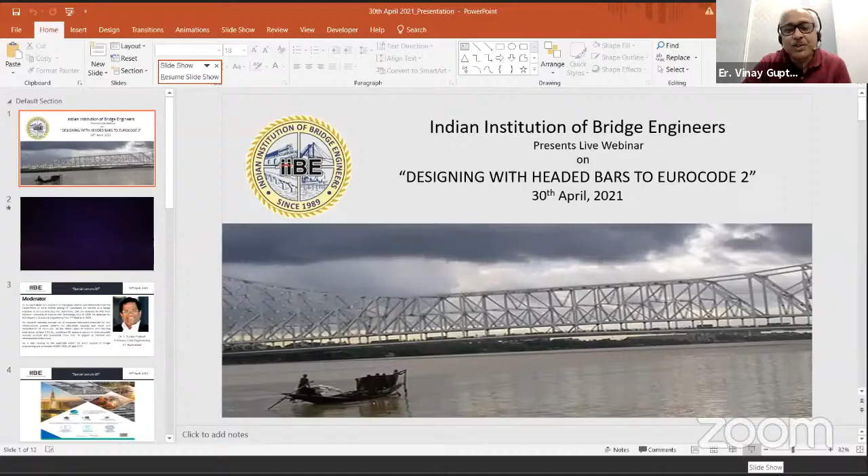This time I'm glad to have Mr. Richard Goodman, who agreed to deliver a lecture in one request. We had to only see that the times match. Being in a Western country, we had to fix a time 1 hour earlier than our normal time of 6pm IST, which suited him as well, being about 12:30 his time.

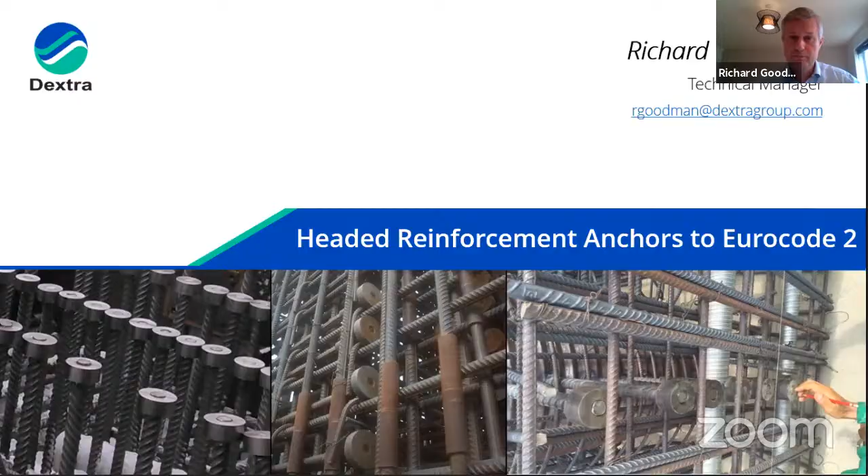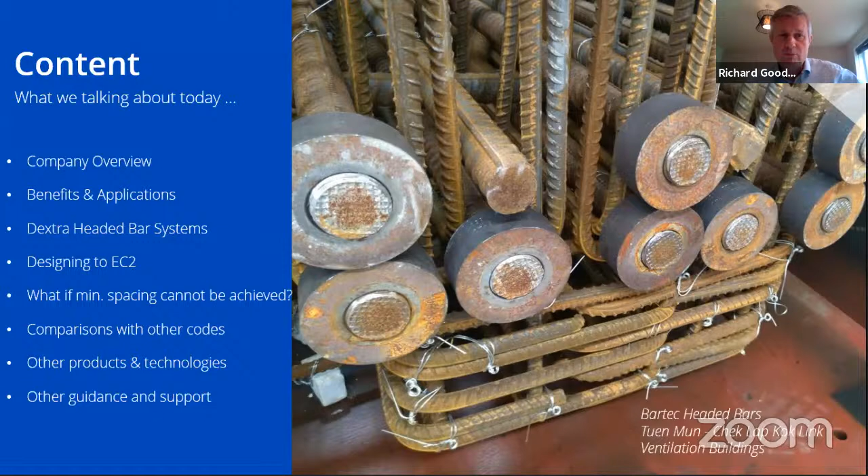I'm just going to give a very quick company overview, tell you who we are and what we do. You've seen the video already. Before looking at the benefits of using headed bars and what their various applications are, a quick look also at the various headed bar systems that Dextra manufacture, before looking at how you can design with headed bars in accordance with Eurocode 2, which would set out the parameters of design, including the spacing requirements, the edge distance, etc. But what if you can't meet those spacing requirements? What can you do? Some comparisons with other codes of practice around the world, a look at other products and technologies, and what other guidance and support is in the marketplace, and what guidance and support can Dextra offer.

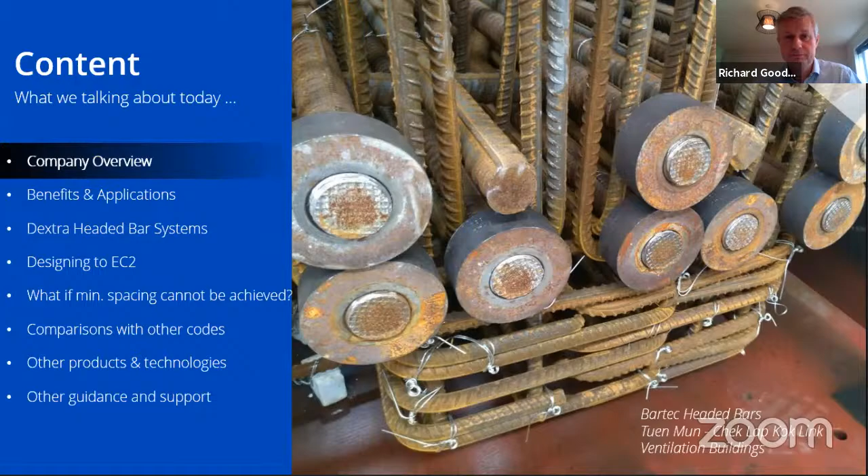You've heard a little bit about Dextra, so I won't dwell on this too long. We were founded in 1983 by a group of French entrepreneurs. Our head office and main manufacturing facilities are in Bangkok, Thailand. We've got over 900 employees in 13 offices around the world and active in 55 countries.

As well as having a factory in Thailand, we also have one in India, just outside Mumbai, and we have a factory in China where we design and manufacture our ground engineering products. Generally around the world, we work through distributors, and with headed bars, the processing of the end of the bar is performed with machinery which is designed and manufactured by Dextra. In India, this machinery will be either at our factory or on site, or possibly with cut and bend rebar suppliers.

As well as rebar couplers and headed bar systems, we also have a range of engineered bar systems - steel bar systems for post-tensioning or pre-stressing of concrete, steel bar systems for tying marine walls, and architectural or structural steel bar systems. And we have a range of ground engineering solutions, some of which make use of our steel bars. Others make use of fiber reinforced polymer bars, which we manufacture at a factory in China.

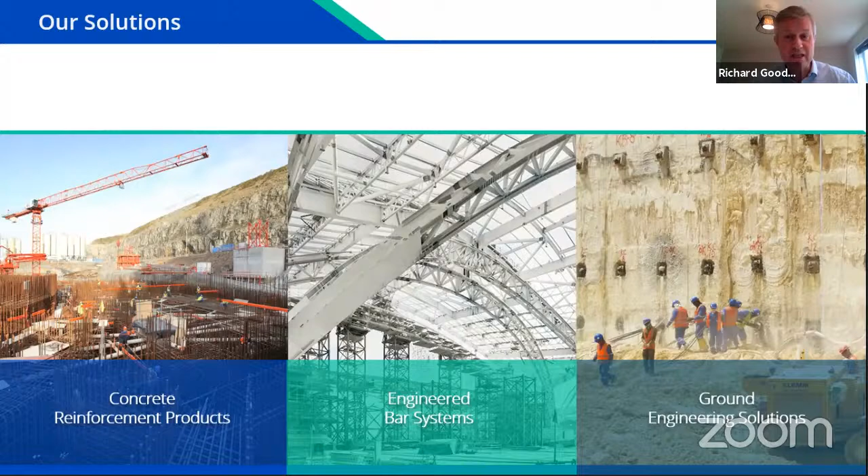As a company, we have a commitment to quality. We have quality assurance through Bureau Veritas, through UK CARES, the Certification Authority for Reinforcing Steels, and also through the American Society of Mechanical Engineers. We also have an in-house third-party accredited test laboratory where we're able to test steels that come in for further processing, and we're able to continuously test our products. Our products are certified by various bodies around the world, and these bodies tend to audit us twice a year and independently test our products continuously.

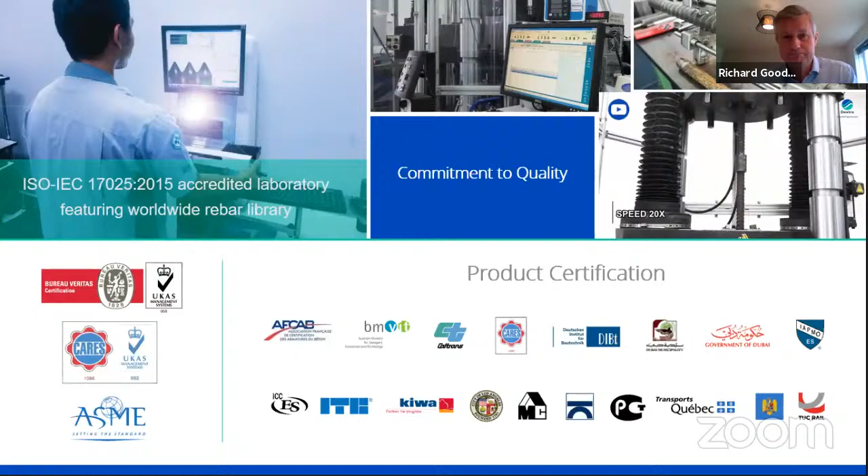So what then are the benefits of using headed bars and the various applications? Well, as I said, headed bars are used as an alternative to either a straight length or a bent length of bonded rebar which is bonded to the concrete to form an anchorage.

So there is potential for a saving on the amount of reinforcement used, and of course you don't have to bend the reinforcement. But in fact, the two main advantages of using headed bars are firstly that it reduces reinforcement congestion considerably, and secondly, handling and fixing a straight bar with a head on the end is a lot easier and quicker on site than fixing a bar bent on both ends. This can lead to a time saving on site, and a time saving can lead to a cost reduction for the contractor.

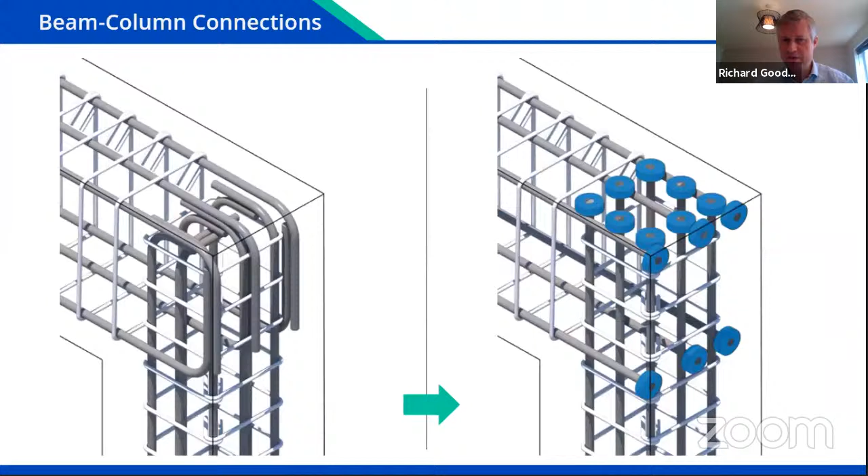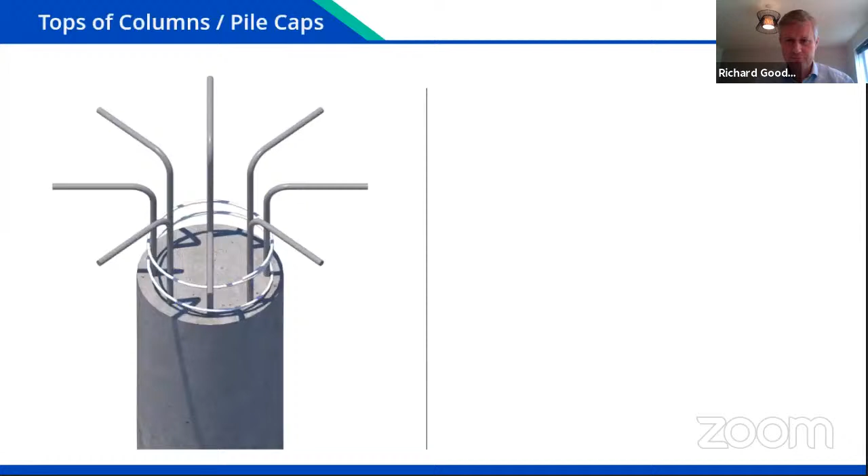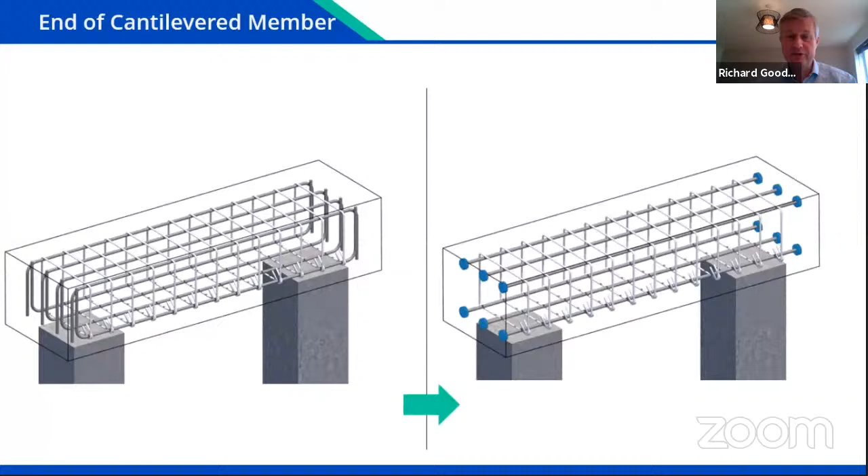The top of columns, or top column crossheads, again as an alternative to a bent bar anchorage. They can be used at the top of pile caps, or at the end of cantilever members, or in corbels.

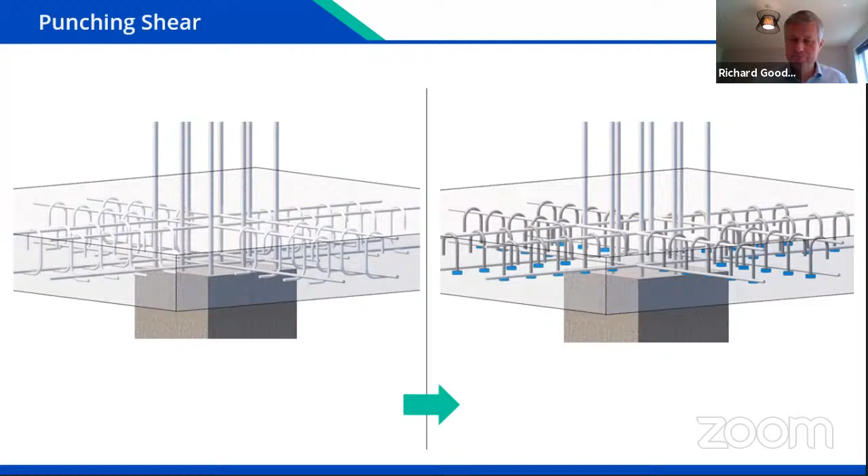And finally, they can be used as cross-wall shear ties, with a head on either one or both ends of the tie.

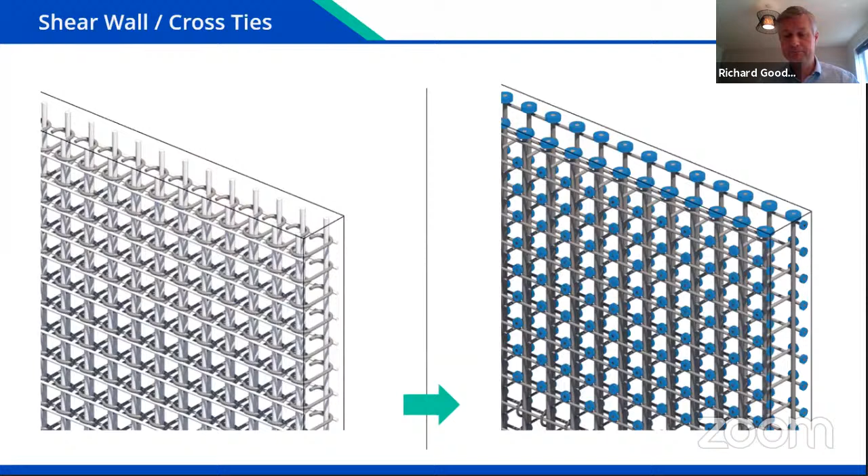Dextra manufacture a range of headed bar systems, not all of which we sell in all markets around the world, but the heads we sell are suitable for 10 right up to 50 millimeter rebar diameter, and we sell them in two main sizes. The smaller size has a bearing area - that is the bearing area underneath the head that bears onto the concrete - of just over 4 times the cross-sectional area of the bar.

We have this size because it is a prescriptive requirement for the USA Code of Practice ACI 318 for designing with headed bars. We also have a larger head with a bearing area equal to or greater than 9 times the cross-sectional area of the bar.

We're finding that the larger head is more commonly used in Europe, or where Eurocode is the applicable code of practice. The 3 systems you see in front of you actually use the same technology as our rebar coupler systems, but I'm just going to focus on the middle system, our Bartec system, because this is the system we tend to sell in India for our rebar couplers.

In the Bartec system, the end of the bar is first cut straight, and it is cold forged to increase the diameter of the bar locally, just at the end, before threading. We then simply screw on the heads, either a large or a small head. By doing this, we don't reduce the cross-sectional area of the bar at all, and we produce a full strength headed bar system, what we call a bar brake system.

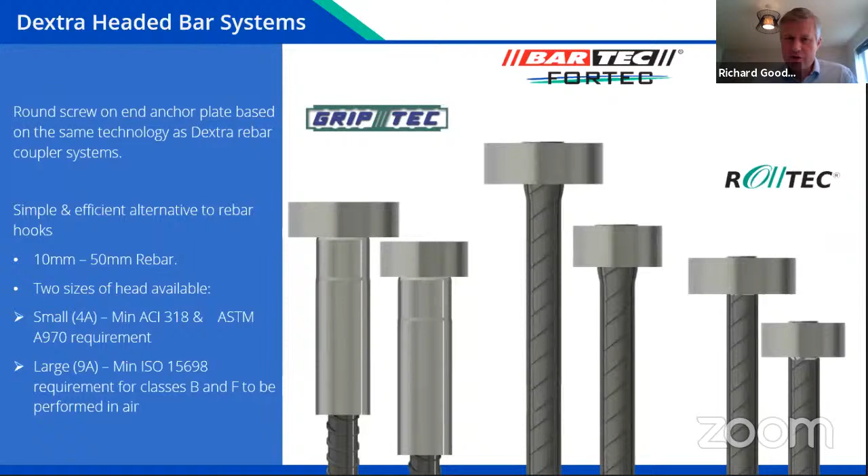The other systems, GripTec and Roltec, we sell in other regions, so I'm not going to dwell too much on those systems. We've also tried to innovate in this region over the last few years.

This is a system we've now introduced into some markets around the world. It's a system we're calling a pressed connection system. It has been specifically designed for smaller rebar diameters, 10 to 20 millimeters.

It's designed so you can cut and bend the rebar on an automatic cut and bending machine, place that bent rebar onto our machine, which is fully automated. The machine will heat the end of the bar by an induction heating process. This end head then gets placed over the end of the bar, all completely automated, and then the bar end gets forged to make the connection.

At the moment, it's only available with the large size, but potentially the same technology could be used for our small size of head. This is ideal for use with transverse shear reinforcement.

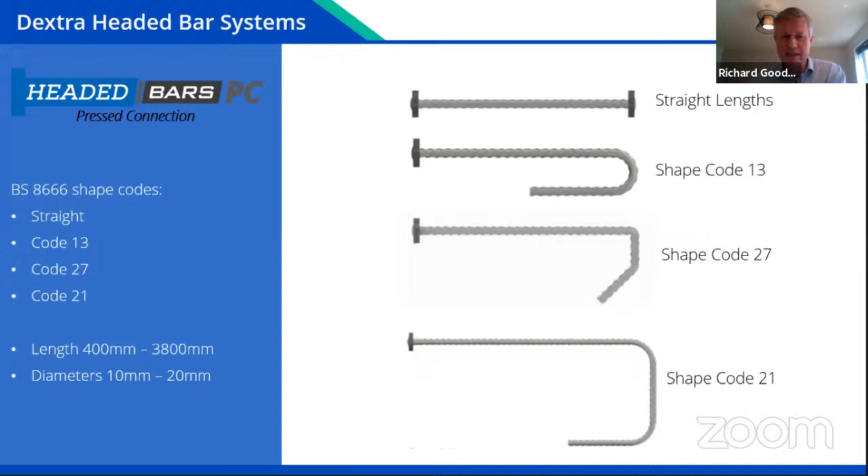Because with transverse shear reinforcement, rather than using what they usually call manual benders, it gets automatically bent in a cut and bend machine. It can be bent automatically, put on our machine, everything is completely automated, it goes around onto a cooling bed and then gets taken off the machine. So ideal for applications like this.

This is transverse shear reinforcement used on this very thick raft in the UK. You can see at the top, we have a bent anchorage, so you can see all the anchorages at the top of this raft. And at the very bottom, some 3 meters or so away from the bend, you can see the head at the very bottom.

So all that happens on this project is they go along and drop this reinforcement into position and they are tying the top. Perhaps you can imagine the difficulty they would have if they had a bent anchorage at both ends. It would be considerably difficult and a logistical nightmare to try and construct the reinforcement.

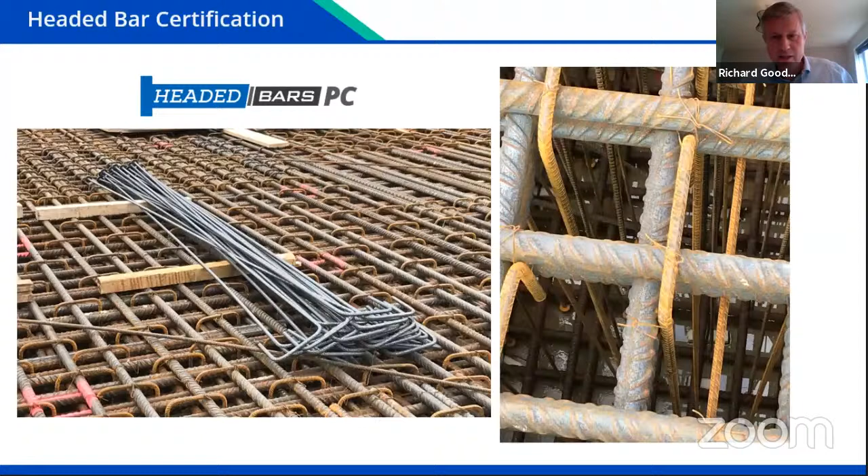So, of course, we hold test reports and certification for our headed bar systems. We have certification through ICC-ES in the United States and certification for various systems through UK CARES, that's the UK certification body for reinforcing steel. We also have independent laboratory test reports to show compliance with the ISO standard for some of our headed bar products, ISO 15698.

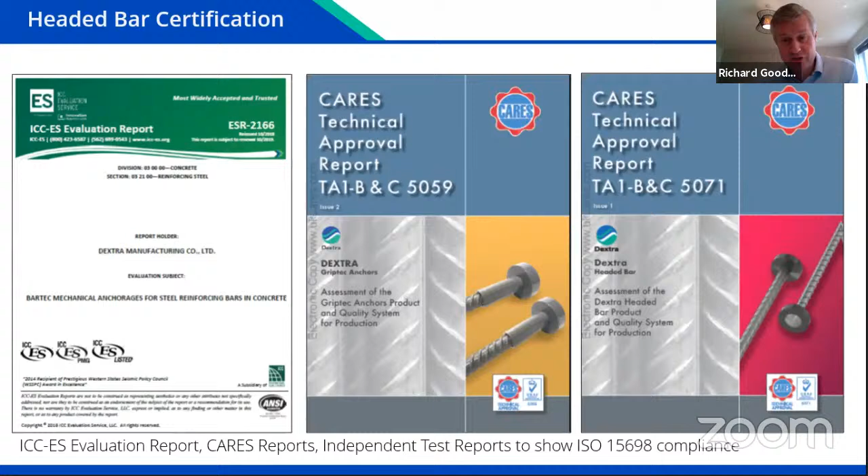So how would you design headed bars to Eurocode 2? Well, firstly, there are a number of product standards for headed bars, one of which I've already mentioned, ISO 15698, and there's a CARES testing requirement. There's also an ASTM standard, which they use in the United States.

But these standards tend to give measures for testing and for the requirements for the strength and robustness of a headed bar system. What they don't do, of course, is tell you how to design with a headed bar system. So for that, we look to the relevant code of practice, whatever that might be.

In some parts of the world, like North America, Australia and Japan, the use of headed bars is prevalent - they use a lot of headed bars. That's because their codes of practice give information about how to design with headed bars.

But the applicable code of practice in Europe, Eurocode 2, and for those countries that use Eurocode 2, there's no specific information that tells you how to design with headed bars, which has led to a situation where there's not been a huge market to date for use of headed bars. Their use hasn't been great.

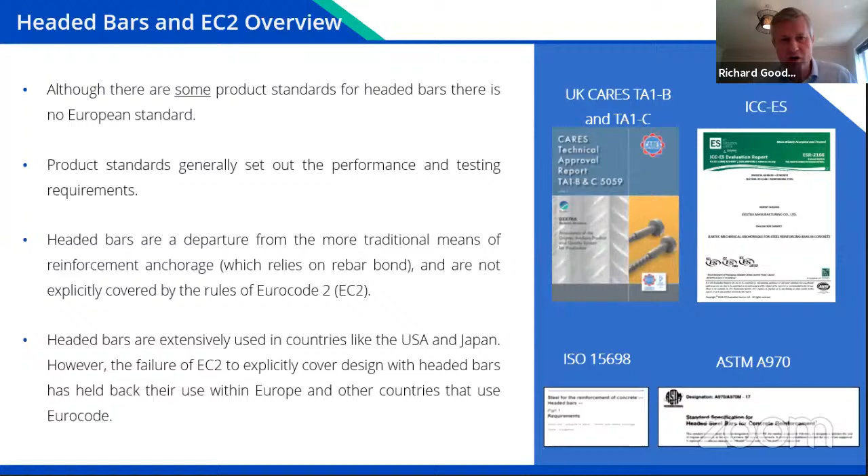So with this in mind, we contacted Arup, the consultant engineers, and we commissioned Arup to write a design guide for how you can design with headed bars in accordance with Eurocode 2.

So rather than being a product guide, this is really a design guide. It's intended as a non-contradictory supplement to Eurocode 2, and it focuses on the capacity of the concrete to resist the forces exerted by the head or by the rebar. So now we're hoping that this will give consultant engineers the confidence to design in accordance with Eurocode 2 and use headed bars.

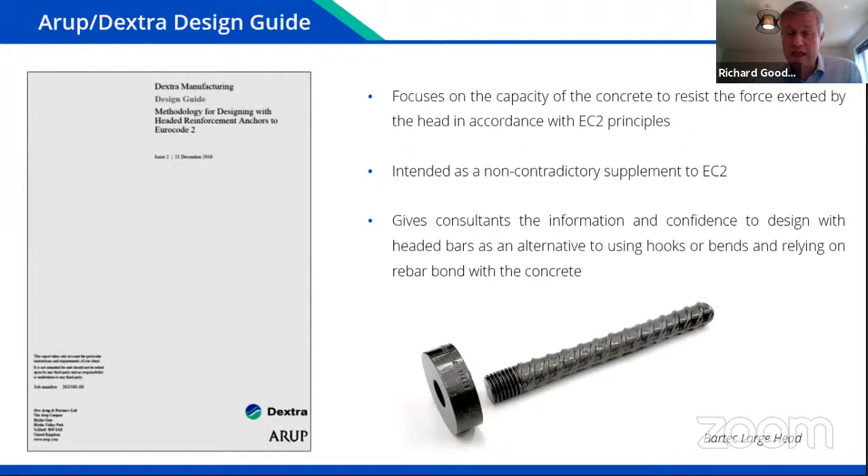While Eurocode 2 doesn't give any explicit information about how to design with headed bars, it does give information about large diameter bars. It says that for large diameter bars, classified as 40 and 50 millimeters, splitting forces are higher and dowel action is greater with the use of large diameter bars. Such bars should be anchored with mechanical devices. As an alternative, they may be anchored as straight bars, but links should be provided as confining reinforcement.

So for 40 and 50 millimeter diameter bars, it gives you the option of having a straight length of bar as an anchorage, or a mechanical device, or a headed bar system, but it doesn't actually give you the option of a bent bar.

Also, I'd like to highlight the Indian standard IS 456, which is for plain and reinforced concrete, and the design guide SP34, which is the handbook for concrete reinforcement and detailing. It states, with regards to the requirements for anchorage, that any mechanical or other device capable of developing the strength of the bar without damage to concrete may be used as anchorage with the approval of the engineer in charge.

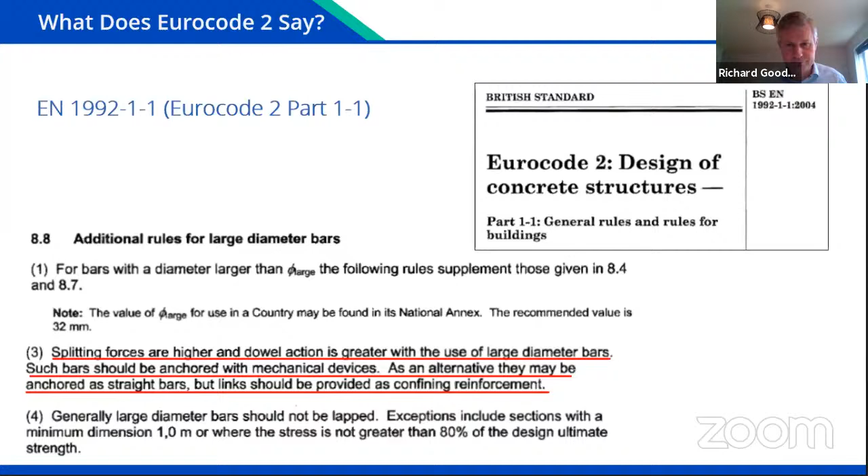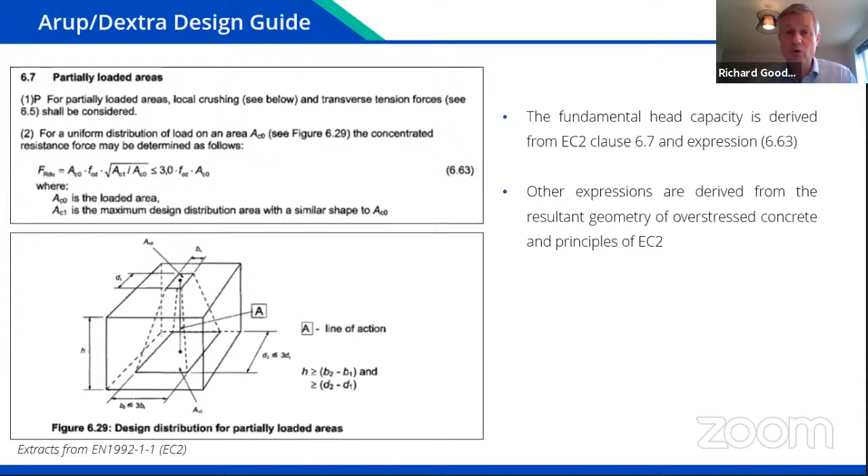The guide is derived from the fundamental principles of Eurocode 2. For the head strength or head capacity, we're looking at the ability of the concrete underneath the head to resist the loads. The basic requirements are taken from section 6.7, which deals with partially loaded areas - that is, small areas which are heavily loaded, causing local crushing underneath the localized area and transverse tension forces, much in the same way as a post-tensioning anchorage performs. Most of the other expressions are then derived from this or from the other requirements of Eurocode 2.

If you have a headed bar embedded in concrete, because the head is relatively small but the load is relatively high, we get a zone or volume of concrete directly underneath the head which becomes overloaded in compression. The stress within the concrete in this zone, shaded in blue, exceeds the design compressive strength of the concrete, but just locally. The stress is at its greatest directly underneath the head, but at distance it dissipates. At dimension h, the stress in the concrete equals the design compressive resistance of the concrete - exactly the same really as what's happening with a post-tensioned anchorage.

Because of this dissipation of force underneath the head, you also get a transverse bursting force. While the concrete is in compression directly underneath the head, transversely it is actually in tension - there's a small tension force which causes the bursting. These bursting forces need to be resisted by having enough concrete around the head or having transverse confinement reinforcement. If the head is large enough and the concrete is strong enough, the full design load of the reinforcement can be taken via the head, transferred to the concrete through this mechanism by head bearing alone.

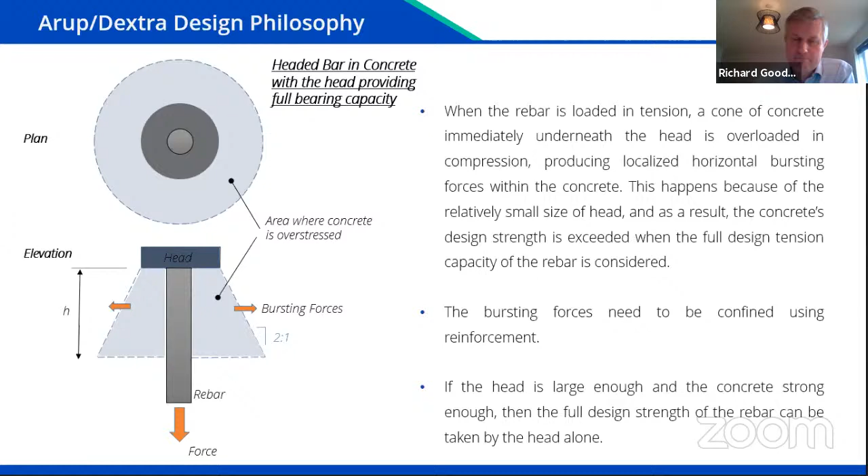However, if you have a relatively small head, or relatively weak concrete, you need to take your design force from your reinforcement via a combination of head bearing and rebar bond. Where you're considering rebar bond, the bond length you calculate needs to be outside of this overstressed zone, essentially because we have these transverse bursting forces within this zone, and therefore a reduction in the bond just locally underneath the head.

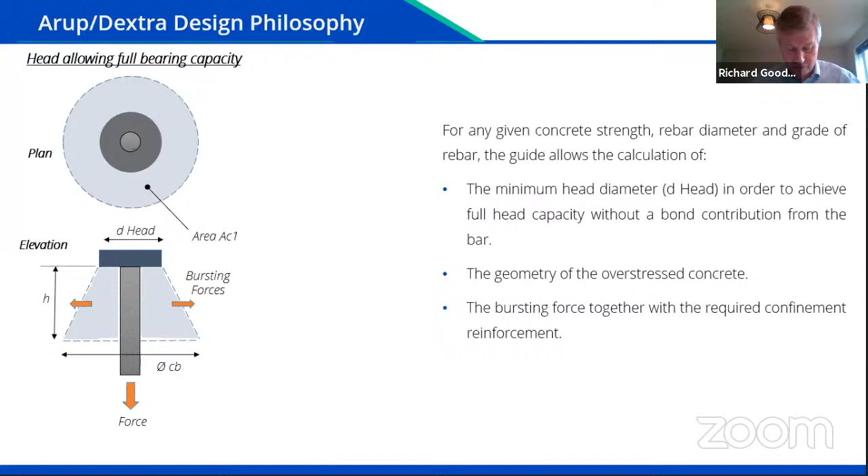So the Arup guide is based on the fundamental principles of Eurocode 2. For any given concrete strength, rebar diameter and rebar strength, the guide allows you to first calculate what size of head is required in order to take the full load via head bearing alone. It also allows you to calculate the geometry of this overstressed region, the height h and diameter cb. If the head isn't large enough, it allows you to calculate the bursting forces, the transverse bursting forces, and once you know these, it allows you to calculate the transverse confinement reinforcement required to resist them. And if the head isn't large enough or the concrete is fairly weak, it allows you to calculate what load can be taken via head bearing and what load needs to be taken via rebar bond.

Knowing the geometry of this region which is overstressed allows us to calculate the spacing requirements for the heads, because these zones of overstressed concrete need to be kept separate. So in the case you see before you, the minimum center to center distance would be diameter CB, because that is the diameter at the base of these overstressed cones of concrete. And the minimum edge distance to the edge of your concrete would be half of CB.

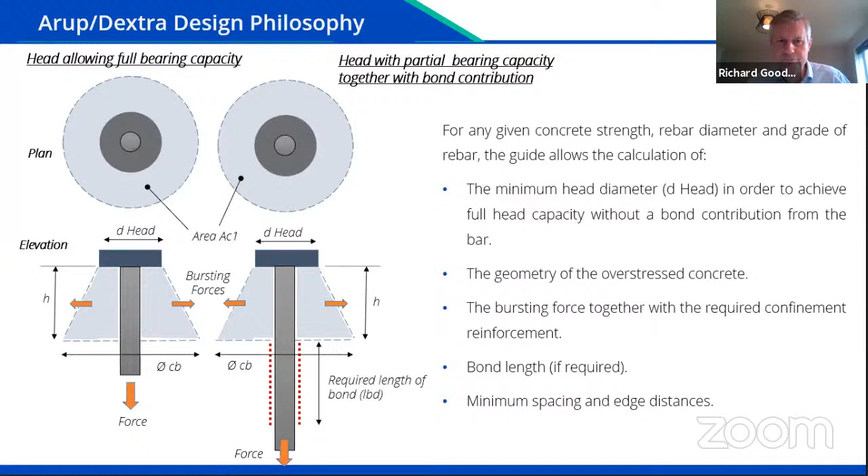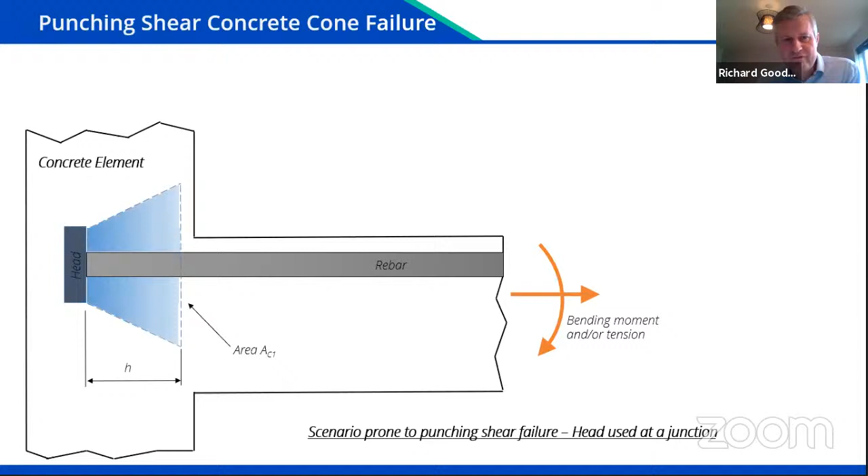If your head is too close to the edge of concrete, there can be a punching shear cone failure where the bar and the head try to punch completely out of the concrete. One situation prone to this kind of failure is in a beam column connection, because you can get a zone of concrete where there's not enough concrete to resist the forces from the head, leading to propagation of a punching shear cone failure. However, this failure mechanism can be calculated in accordance with Eurocode 2, and if necessary, additional reinforcement can be added to prevent it occurring.

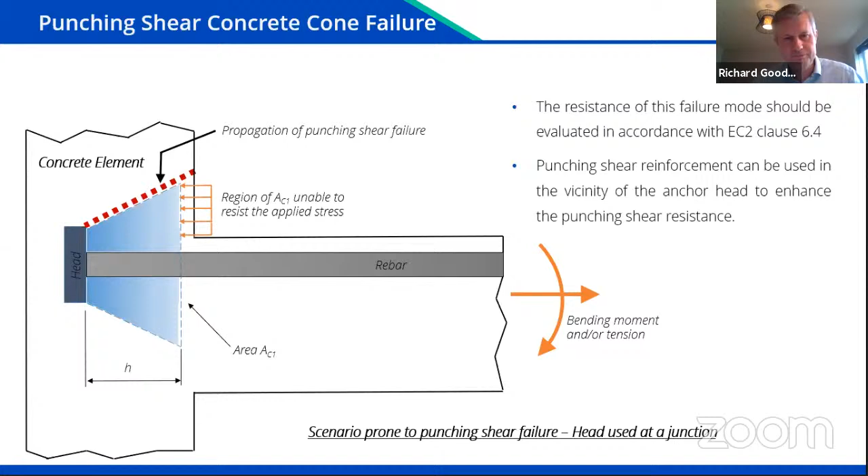Eurocode 2 does allow you to use headed bars. It calls them mechanical anchorages, taken to mean headed bars. It gives information about large diameter bars, saying they need to be anchored with headed bars or with straight lengths of anchored bar. But it doesn't explicitly give you any design information, and it doesn't explicitly tell you that you can take part of the load via head bearing and part via rebar bond. So where does the justification for doing that come from?

There are many technical reports and papers written about this based on experimental research, and all of them show that if there is a bonded length in the anchorage zone, load is first taken by this bonded anchorage zone length. But very quickly, at quite small loads, the load is then transferred also to the head. Thereafter, it is taken via head bearing and rebar bond if there is an available bonded length. If there isn't an available bonded length in the anchorage zone, the load has to be taken via the head alone.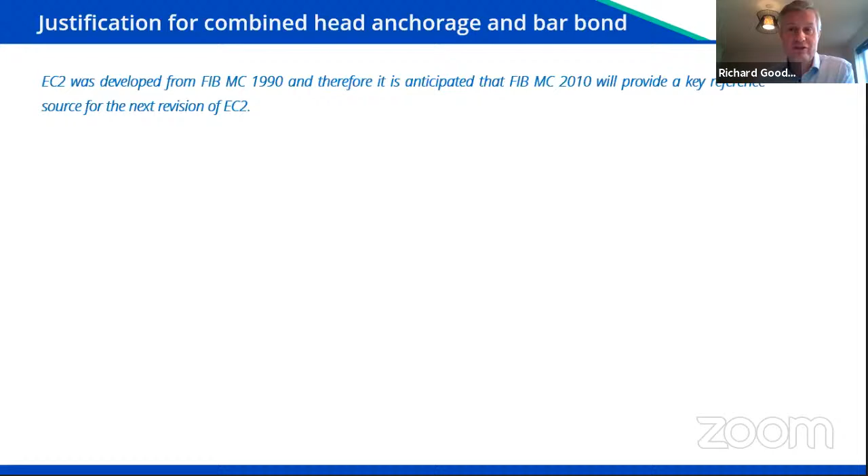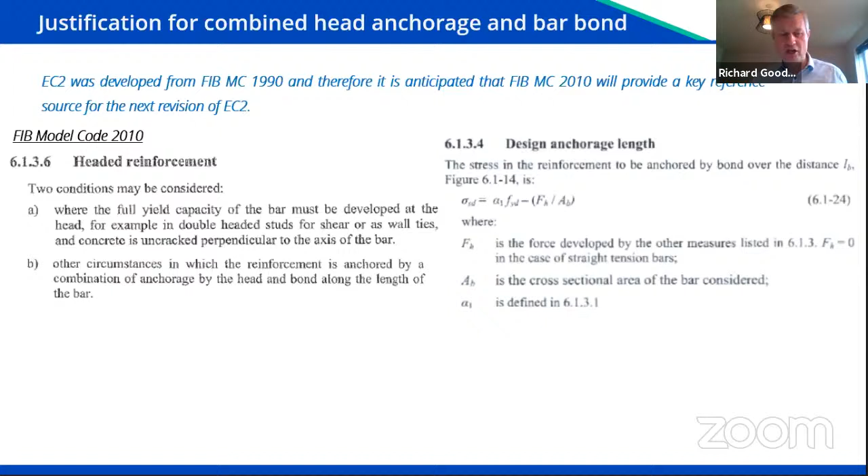Eurocode 2 was developed from the FIB Model Code 1990, so it's anticipated the next version of Eurocode 2 will rely heavily on the latest FIB Model Code, the 2010 version. That gives information about how to design with headed bars, under two conditions: one where you're taking the full load via head bearing, and one where you're taking the load via head bearing and rebar bond. Also, the American Code of Practice, ACI 318, has provisions for headed bars entirely drawn from experimental research.

The head needs to transfer load into the concrete through a combination of bearing force at the head and bond forces along the bar.

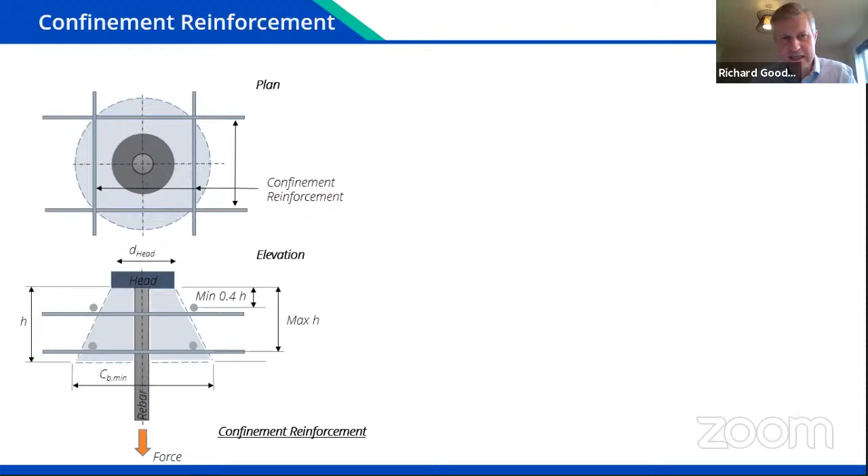Directly underneath the head, we have this zone of concrete which is overstressed in compression, but we're also getting small transverse bursting forces which need to be confined. Generally you would need confinement reinforcement, or physically enough concrete around the head, to resist those forces. In the Arup Dextra guide, there's information about the transverse reinforcement that can be used, in the form of straight bars, closed links or hoops. It needn't go through the overstressed zone, just be suitably placed to confine the concrete, and needs to be placed between 0.4H and H, where H is the height of overstressed concrete.

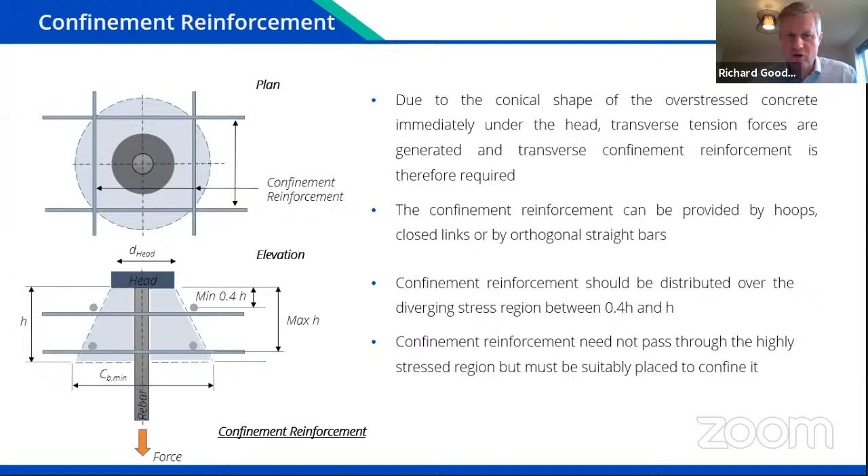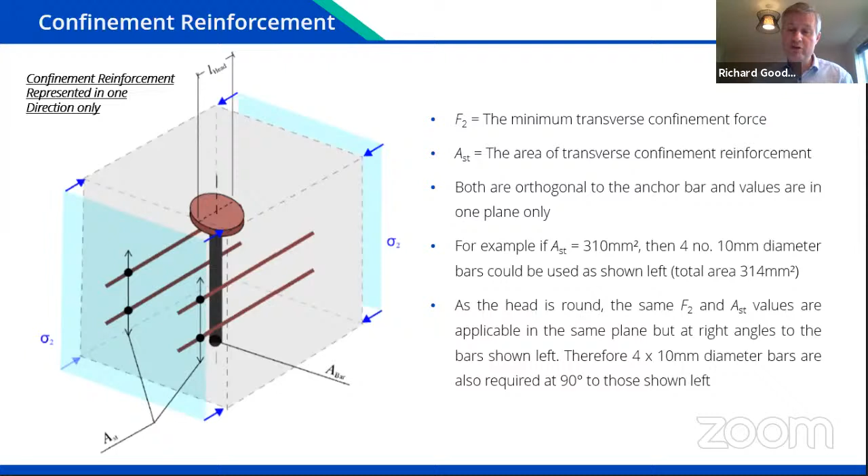The expressions for the transverse force and transverse reinforcement given in the Arup Dextra guide relate to the forces in one plane only, at right angles to the headed bar. So for example, if you calculate that you require 4 individual bars to resist the transverse bursting force, it also means you need 4 bars at right angles to the ones shown in the diagram, because the bursting forces act 360 degrees around the head.

Here we have a plan view of 3 heads which are very closely spaced. They are, if you like, an array of heads. So in the center, we have our anchorage.

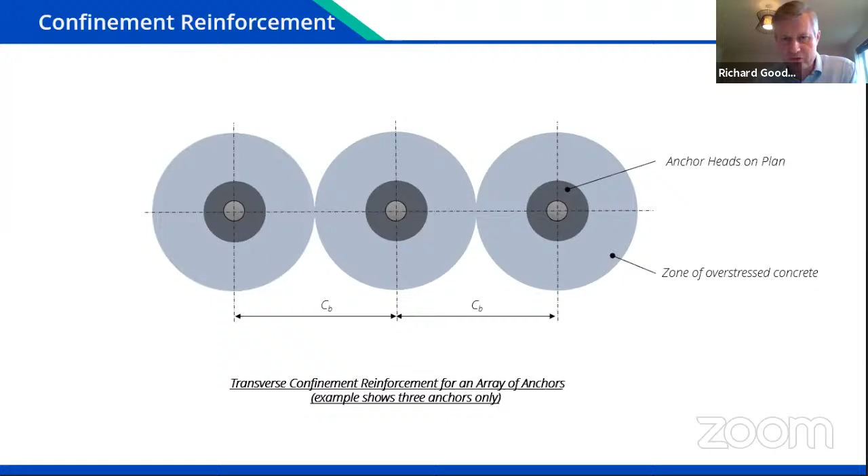Right in the middle of our bar, this is our head, and the lighter blue zone is this zone of concrete which is overstressed. The transverse bursting forces act 360 degrees around the head, which means that if you have an array of closely spaced heads, the confinement reinforcement only needs to resist the unbalanced forces. As you can see, the forces between the heads are actually equal and opposite, so they effectively cancel each other out.

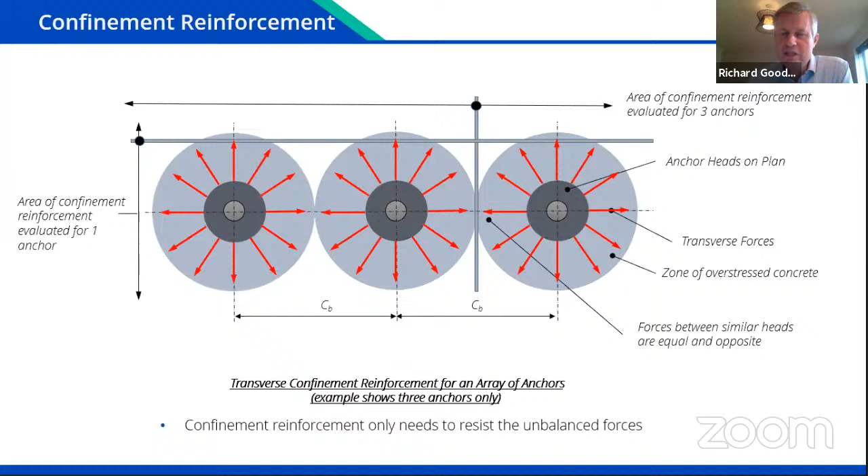This means that longitudinally along the array of heads, you would need reinforcement which equates to the forces from one anchor only, whereas transversely you would need reinforcement which equates to the forces from all 3 anchors in this case.

One question which we often get asked is, can headed bars be used in compression for compression reinforcement? Of course, the danger in using headed bars for compression reinforcement is that there is potential for a punching shear cone failure if the load is transferred to the head.

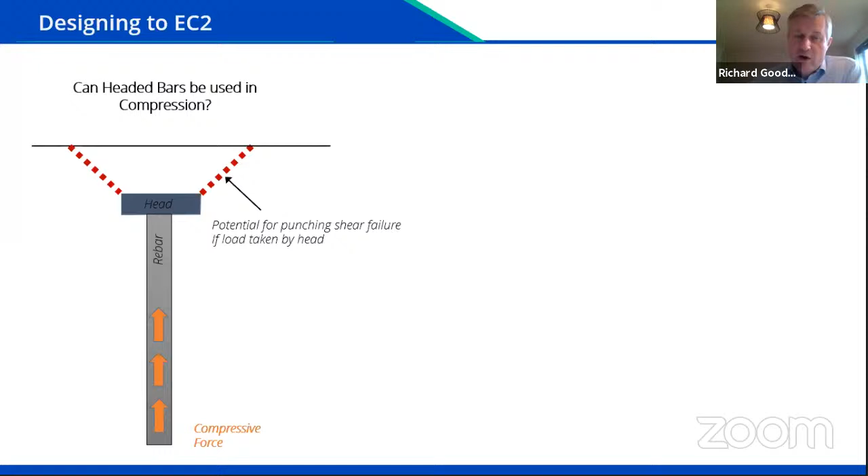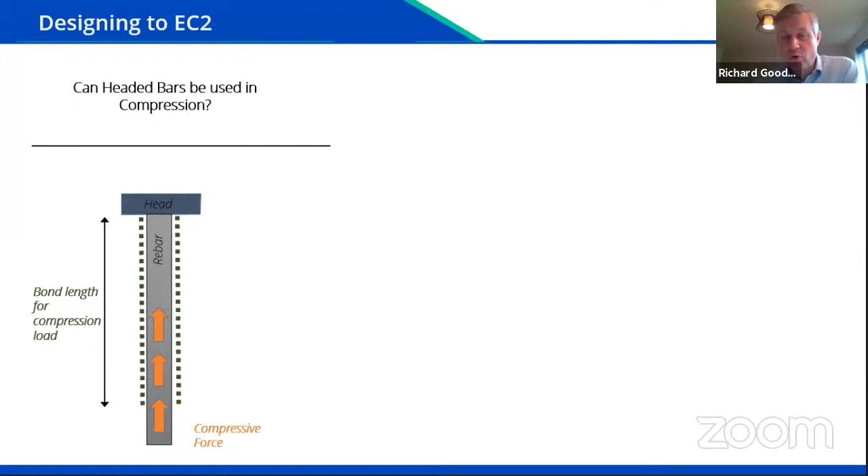One way of preventing this happening is to ensure that you have a bond length underneath the head which is capable of resisting the compression force. But it's interesting to note that within Eurocode 2, for bent anchorages, it states that bends and hooks do not contribute to compression anchorages. It says something very similar in other codes of practice also.

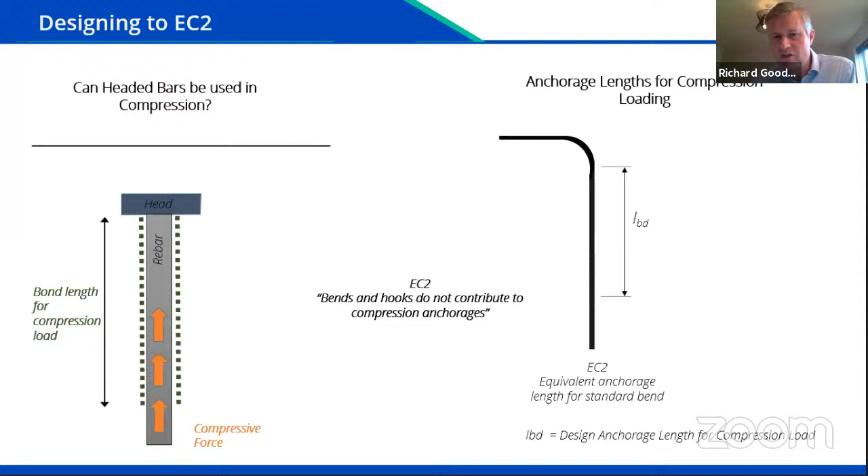In ACI 318 it has almost the exact same wording. So for a bent bar anchorage, that means you need to take your bonded length as a straight length before the bend in the rebar - this is the anchorage length for the compression reinforcement.

But for a headed bar, the length of anchorage would be the same for the same compression load, but the length starts underneath the head, which often means you could have a smaller or shorter anchorage zone, because you can start the bonded length of rebar required closer to the edge of the concrete. So it even has an advantage in its use if the rebar is in compression.

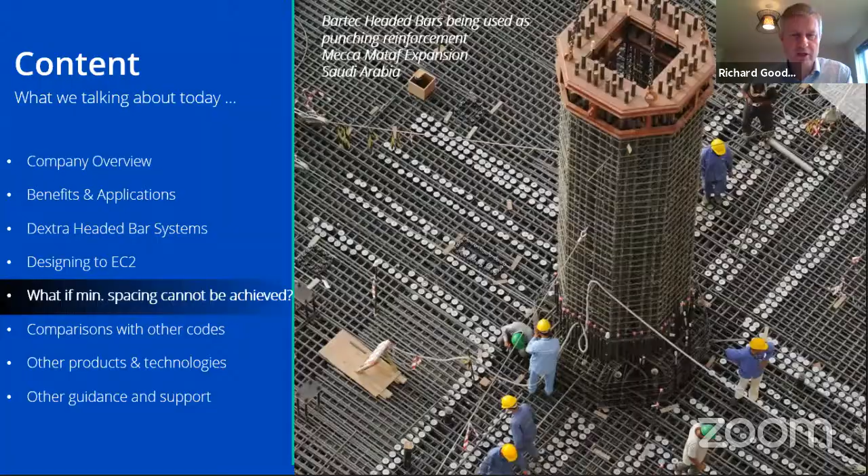By using Eurocode 2 as implemented by the Dextra Arup guide, we can set out the minimum spacing requirements and the minimum edge distance based on the zones of concrete which are overstressed, keeping them separate. But what if you can't achieve those spacing requirements? What do you do? Well firstly, it's important to note that this zone of overstressed concrete and its size depends on the concrete strength.

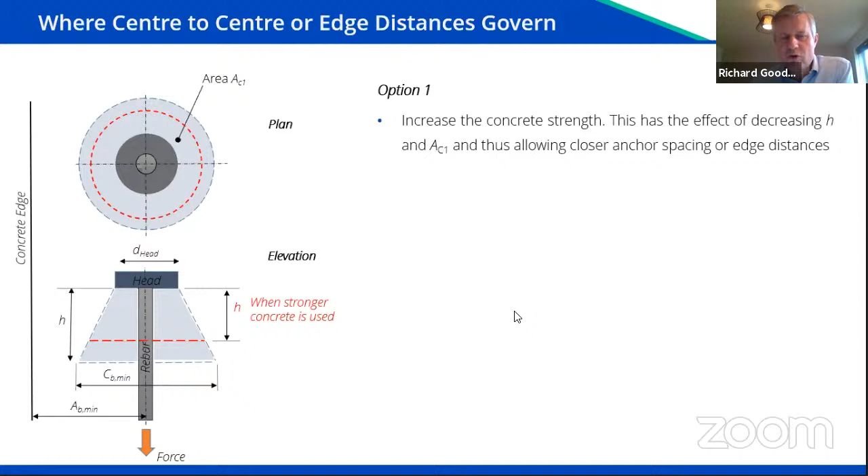So if you were to simply increase concrete strength, you can decrease this H dimension. The zone of overstressed concrete would firstly be bounded by the dotted blue line, and then if you increase the concrete strength it would be bounded by the red dotted line, which means you can have closer spacing. But it's not always convenient just to increase concrete strength.

The other thing to note is that generally the equations within the guide assume you're taking the full design load of the rebar at the head anchorage - the full design load is being transferred right at the end of the rebar into the head. In cases where this isn't so, you can use a smaller design load, which would make your zone of overstressed concrete smaller, and allow closer spacing requirements or a closer edge distance. But again, sometimes that isn't always the case.

So one technique that can be used, and there are several, but this is perhaps the simplest, to overcome the problem if you can't achieve the spacing requirements is as follows. Here you can see two heads which are fairly closely spaced. If you take the full design load of the rebar, you can see that you are getting zones of concrete

which are zones of compressed or overstressed concrete, bounded by this dotted blue line. You can see that on plan they overlap, and they overlap the edge distance of the concrete. So what do we do in these situations? What's an effective method for dealing with this?

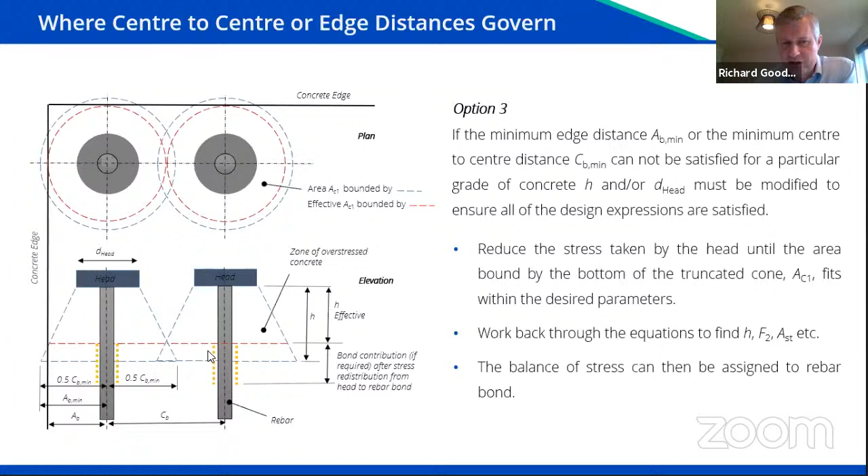So we need to ensure we have enough anchorage length within the anchorage zone so there's sufficient bonded length of rebar before the head. This technique can be used effectively all the way until we get to the very minimum spacing requirements in order to successfully place and compact our concrete.

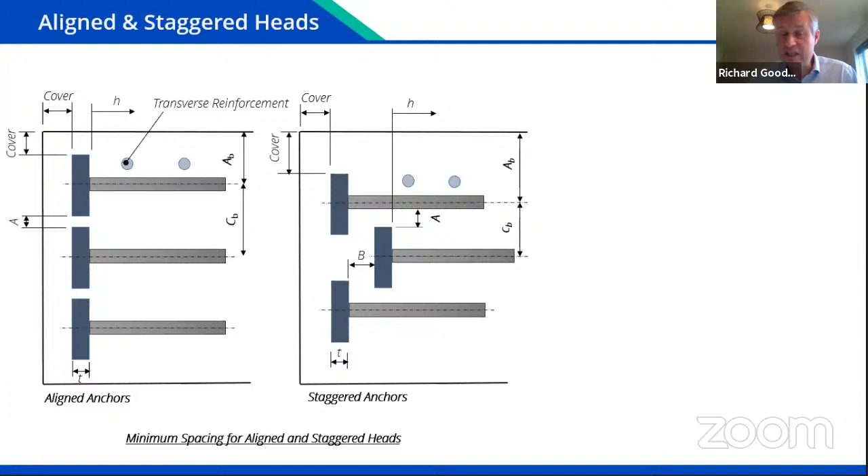These are generally dictated by the code of practice, in this case Eurocode 2, for the cover, for the maximum and minimum areas of reinforcement in the member, and for the spacing between the bars. We've given two additional expressions: A, the spacing between the heads or between the head and the bar, and B, this offset dimension. Within the guide, we've given A as the maximum of the head thickness or 12 millimeters, to allow for successful placement and compaction of the concrete.

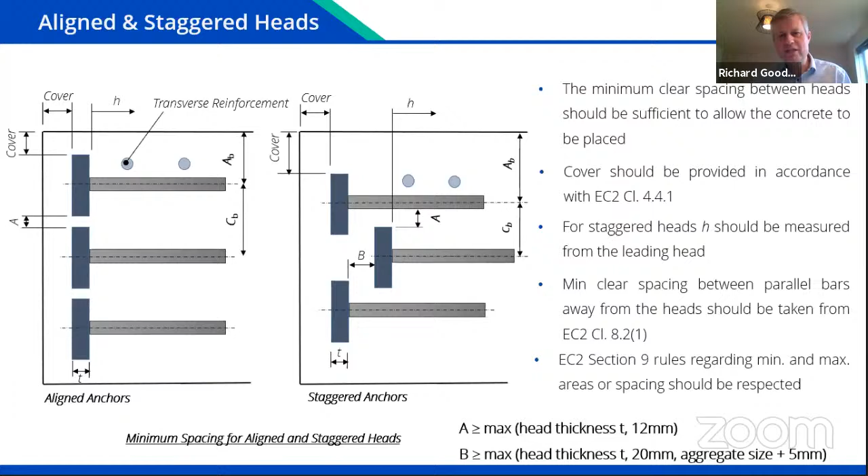We've given B as the maximum of the head thickness, 20 millimeters, or the aggregate size plus 5 millimeters. This technique of transferring load from the head to rebar bond can be used all the way down to the minimum spacing requirements. But as you reduce your spacing requirement between the heads, it means you need a greater and greater bond length.

So how do our heads fit in with these requirements? If you take a grade 500 rebar and the code parameters within Eurocode 2 - partial factors of safety and other factors - if you use one of our large heads, a 9A head, you won't need a bond length contribution provided the concrete is C25/30 or stronger. In Europe, this is how we designate it: the C25 is the cylinder strength, and 30 refers to the cube strength. However, if you use one of our small heads, you need a much stronger concrete, C50/60 or C55/67, in order to take the full load of the rebar via the head alone.

But in both cases, you need to comply with the minimum spacing requirements that are calculated. And if you can't, effectively it means you need to have a bonded length of rebar, or an increase in the bond length of rebar below the head.

So a comparison with other codes of practice. Firstly, the FIB model code does give information, prescriptive information about headed bars - simplified rules, if you like, rather than working from first principles. Where the load is taken just by the head alone, it gives fairly simple rules for a head with a bearing area of 8A, so slightly smaller than our 9A head - meaning a bearing area just over 8 times the cross-sectional area of the bar. It then gives the center-to-center distance and edge distance spacing requirements as a function of the bar diameter, for a minimum concrete strength.

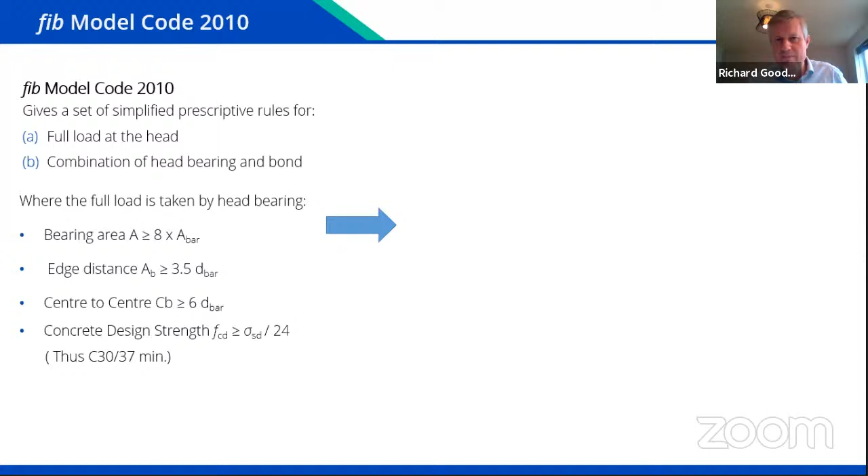But if we were to put numbers to that, it means that for a 32 millimeter bar, we get an edge distance requirement of 112 millimeters - that's from the center of the bar to the edge of the concrete - and a center-to-center distance of 192 millimeters.

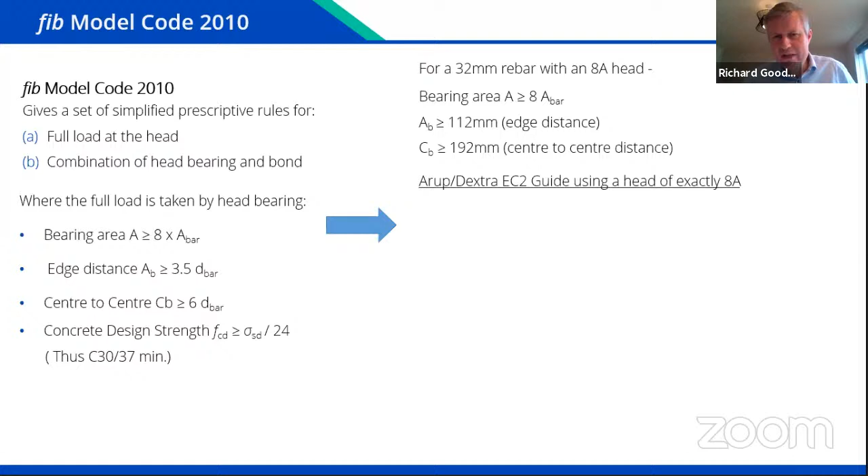So how does that compare with what you'd get with the Arup Dextra guide, following Eurocode from first principles? If we look at the very minimum strength of concrete, C30/37, which is part of these prescriptive rules of FIB model code, it actually gives a more conservative result in that we require greater edge distance or center-to-center distance. So we can say that the Arup Dextra guide, from first principles of Eurocode 2, is a little bit conservative when compared to the FIB model code.

But one of the advantages of working from first principles is that you don't need to stick to the minimum strength of concrete, and you find that with increased concrete compressive strengths, the center-to-center distance and the edge distance start to decrease dramatically.

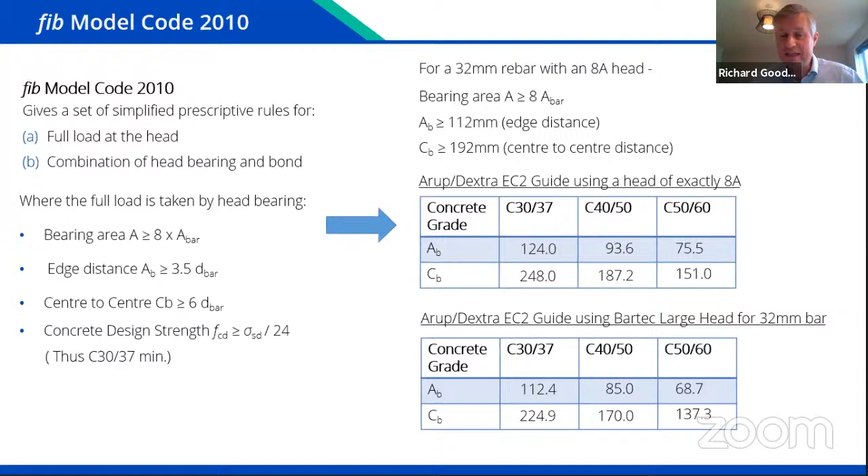The same could be said for the actual head size for your headed bar system. Our large heads are 9A rather than the prescriptive 8A head given in FIB model code. If we use a 9A head, such as the Bartec head system, we again have a reduction in the edge distance and the center to center distance. So there are clear advantages of working from first principles to Eurocode 2, as implemented by the Arup Dextra guide.

The American Code of Practice ACI 318 gives a set of simplified prescriptive rules, where the load from the bar is taken via a combination of head bearing and rebar bond, and it doesn't give any alternative. These rules have really been derived purely from experimental research. So the head size needs to be relatively small - it gives the head size as a 4A head. This is one of our small sizes, which is really why we chose this small size in the first place, because of these prescriptive rules in ACI 318.

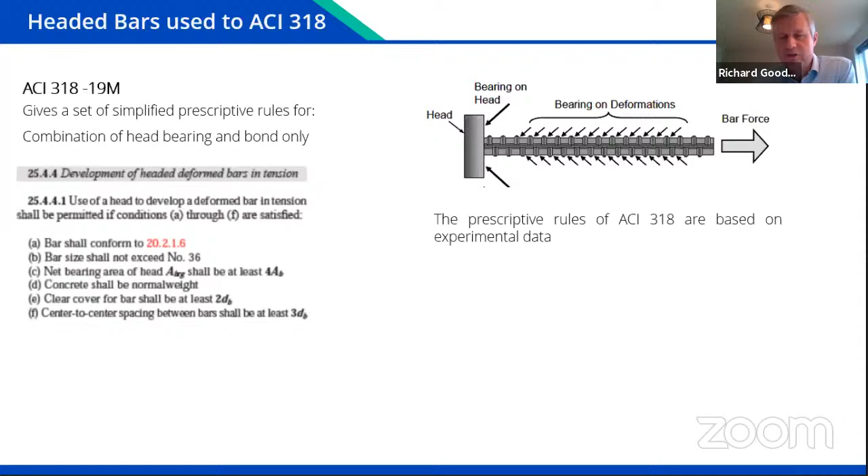It says that normal weight concrete should be used, and then it gives the center to center and edge distance as multiples of the rebar diameter. The thing that changes is the bond or development length, which is a function of the concrete strength, the rebar diameter, the rebar strength, and a number of other factors, depending on whether it's epoxy coated or not, a location factor, and a strength factor.

So what changes is not the spacing, but the rebar bond length requirement. What's actually happening is, as you have a longer rebar bond length requirement, there is less load on the head. Or if you have a shorter bond length, you get more load taken via head bearing.

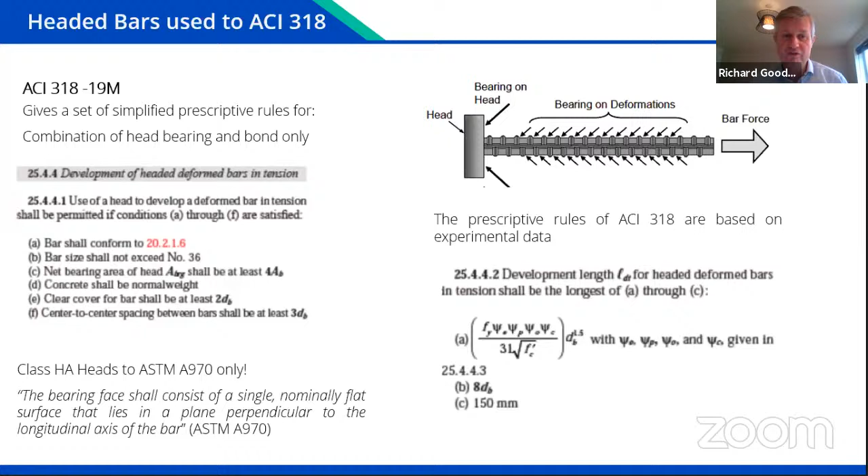ACI 318 makes reference to ASTM A970 as the applicable product code for headed bars. ASTM A970 says that a performance class HA head should be used to comply with ACI 318. It also states that the bearing face shall consist of a single nominally flat surface that lies in a plane perpendicular to the longitudinal axis of the bar.

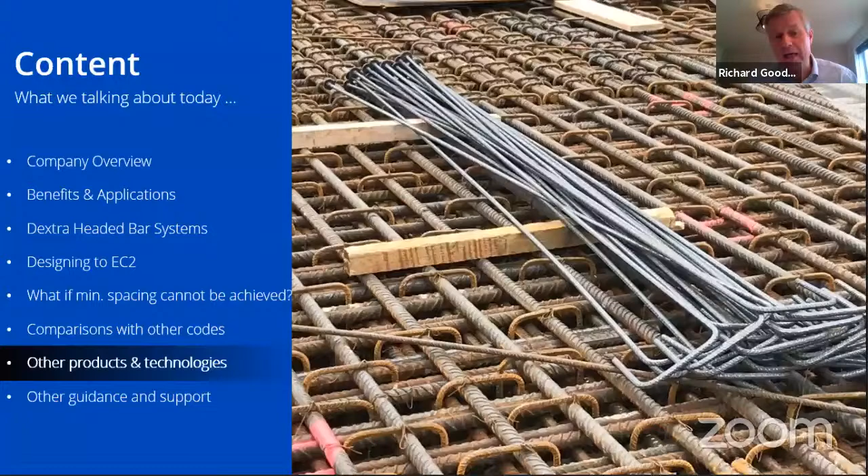So what other products and technologies are in the marketplace, and perhaps what should you be looking for in terms of the product that you should be using?

The shape of the head itself actually dictates the volume of concrete underneath the head which is overstressed. So with a round head, you get a conical volume of concrete which is overstressed underneath the head. And clearly with a square head, it becomes a pyramid of overstressed concrete.

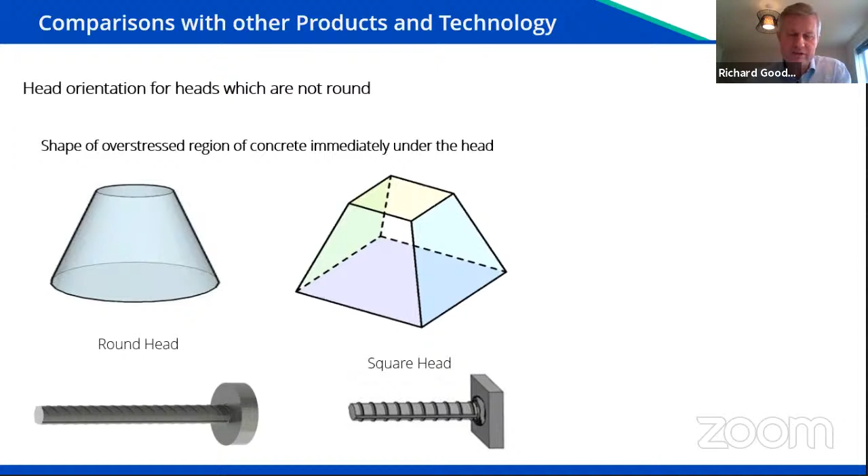This matters, because with round heads, you could rotate the bar and the geometry stays the same. But with other shapes, such as square heads, the geometry of the overstressed region changes - it rotates as the head rotates. So in theory, you need a center to center distance of CB minimum, because that's the diameter at the base, or the across-flats dimension, at the base of this overstressed concrete. So from center to center would be CB minimum also.

But if you were to rotate one or both of these heads, the zones of overstressed concrete would intersect. So to keep those zones separate, you need to increase the center to center distance. But with any shape of head other than a round head...

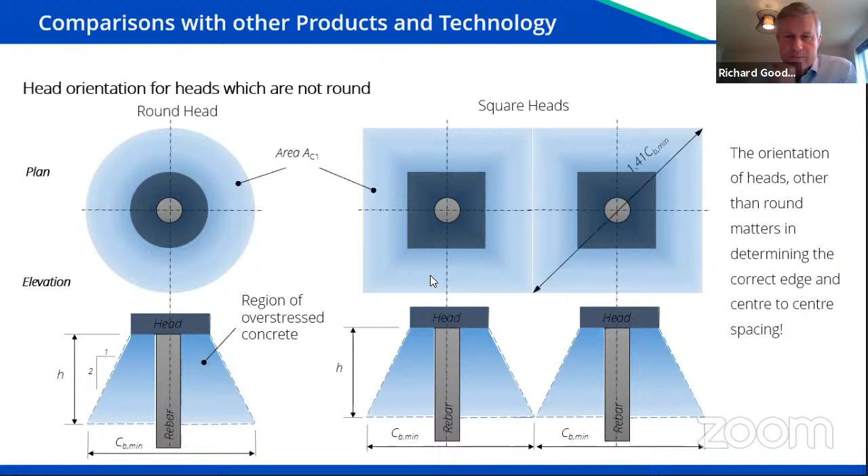With a shape of head other than a round head, this is really impractical to do on site. It's very, very difficult to try and align square heads or other shapes of head. But with a round head, it is not a problem - the geometry is always the same, regardless of how you rotate the head. So there are clear advantages of using round heads over other shapes of head.

There must be good concentricity between the rebar and the head itself, because one of the fundamental requirements is that the bearing load is evenly distributed on the head. If you don't have good concentricity, you need to assume you have a smaller effective bearing area, which makes the head less efficient. It means you need a greater spacing requirement, and potentially a greater bond length requirement for your rebar. So there should be good concentricity between the rebar and the head diameter.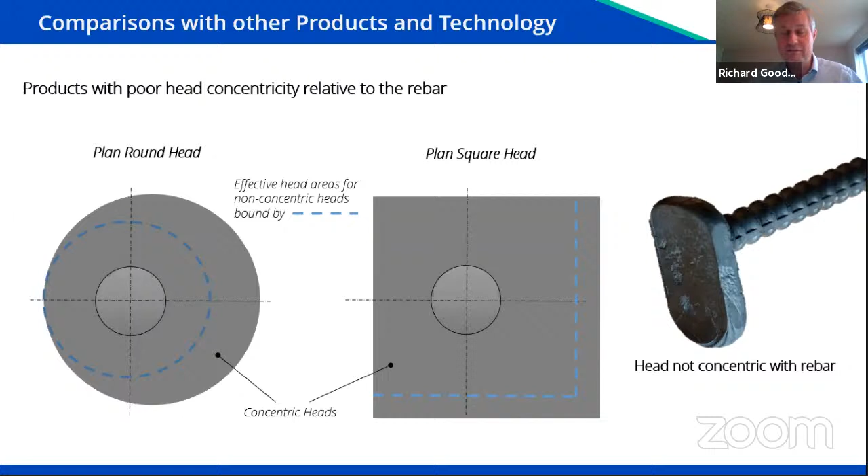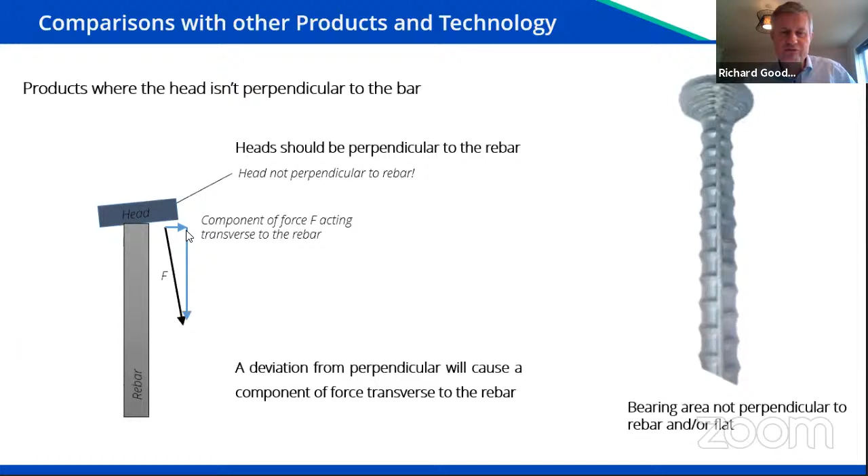And the head should not only have a flat bearing area, but it should be perpendicular to the rebar, as I said before. If it's not, you get a component of force acting transversely.

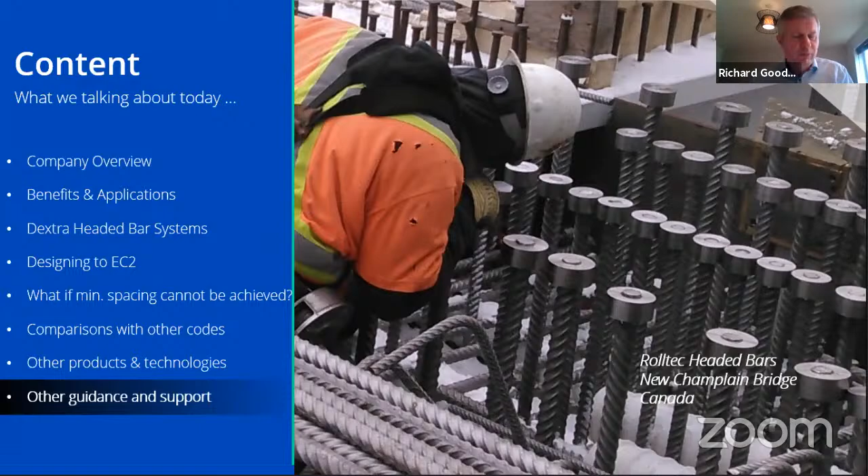So what other guidance is there? What other support can Dextra offer? Back in 2013, there was an interesting article written and published in the Structural Engineer in the UK. In fact, Dextra commissioned this article. It looks at how to design with headed bars and compares different requirements of Eurocode, ACI 318, and the FIB model code. But what it isn't is a step-by-step guide. It doesn't give you step-by-step information. That's really why we approached Arup, the consultant engineers, to write this design guide.

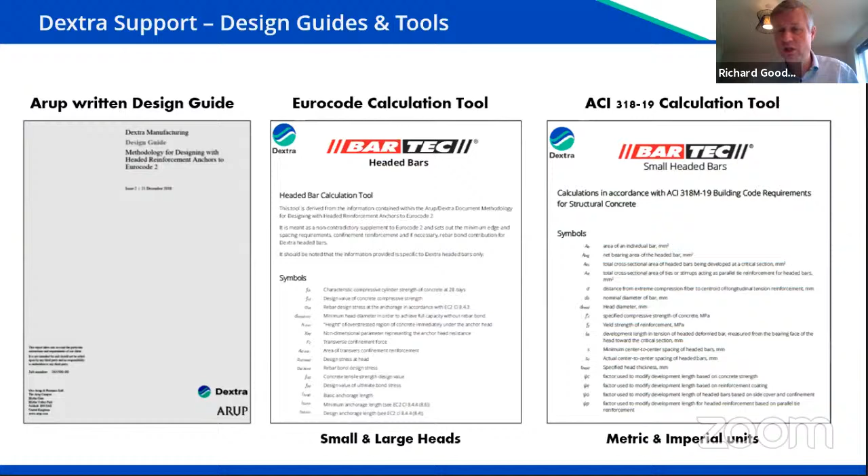Now, based on this Arup design guide, which works on the fundamental principles of Eurocode 2, we have electronic tools. For products like our Bartec headed bar system, we have an electronic tool so you can use either small or large heads, input the relevant parameters, and set the design requirements. These tools are available from our website to download. We also have an electronic tool for ACI 318, for both imperial and metric units.

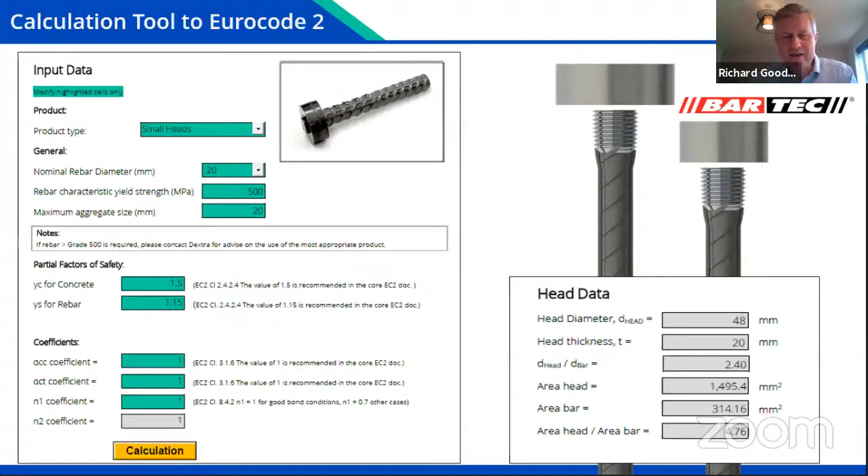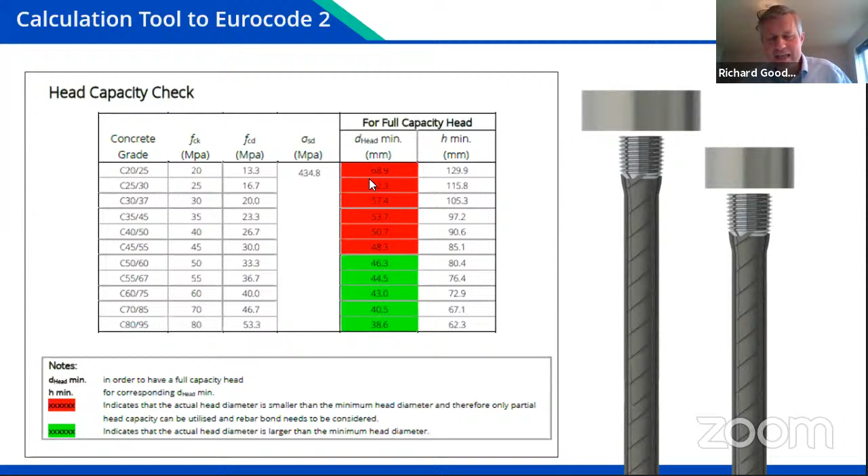You then need to press the calculation button. It imports the relevant data about the size of the head and starts to run through the calculation. The first table checks to see if the size of the head is enough so that the full load can be taken via the head alone. So at the bottom, shown in green, it shows that for this particular size of head, which is in fact one of our small heads, you need to use a C50-60 strength of concrete or stronger in order to take the full load via the head, as shown in green. Whereas for the weaker sizes, you need to take the load via a combination of head bearing and rebar bond.

We then get a table that deals just with the weaker grades of concrete. Working from left to right, we have the concrete grade, the cylinder strength, the concrete design strength, and the design rebar stress at the anchorage. Here we are assuming grade 500 rebar, 500 divided by the partial factor of safety, 1.15, is 434.8. We then have a non-dimensional parameter, which we call XRD, which varies between 1 and 3.5, depending on what kind of capacity the head is taking. If it is working to its full capacity and taking full load, the value of XRD is 3.

And then we have the spacing requirements: the minimum edge distance AB, minimum center to center distance CB, and the absolute minimum dimensions to ensure that you can place and compact your concrete. And then we have the transverse confinement force, and the amount or cross-sectional area of transverse confinement reinforcement. We configured that so it assumes you're using the same grade of reinforcement as you are for the headed bar itself.